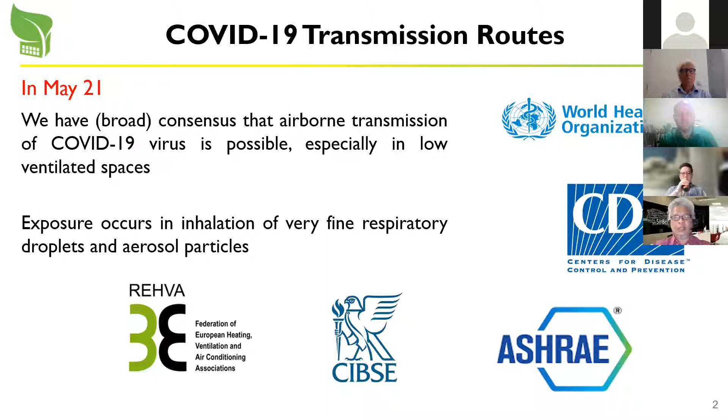So now we have broad consensus that airborne transmission of the COVID-19 virus through the air is possible, especially in low ventilated settings. This is important mainly because while we wait for herd immunity to be acquired in the community, we can craft a set of intervention procedures that will allow the economy to come back while controlling the virus. This is a big challenge. In the context of today's talk, we should be making buildings resilient for people to safely work in until we reach widespread immunity.

Back in April 2020, when the virus first started to kick off here in Singapore, we decided to develop this document for Singapore based on a precautionary approach. It is non-mandatory, and was based mainly on our many years of experience in the field of indoor air quality, mechanical engineering, exposure science, and also past research studies on other infectious diseases like measles, influenza, and tuberculosis. These recommendations are mainly for office buildings, childcare centers, and residences.

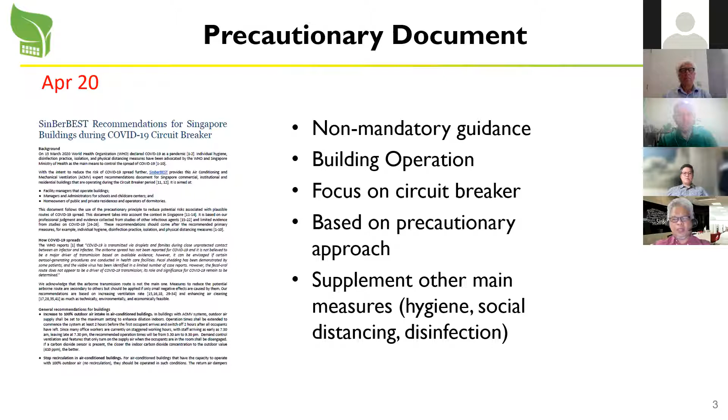About 1.5 months later, based on this document, the Singapore government came up with a technical note based on the same principles for building operation under the COVID pandemic. Just in the past month, they further refined the document. So three documents have been presented over the past 1.5 years here in Singapore on how to operate buildings to reduce the risk of airborne transmission.

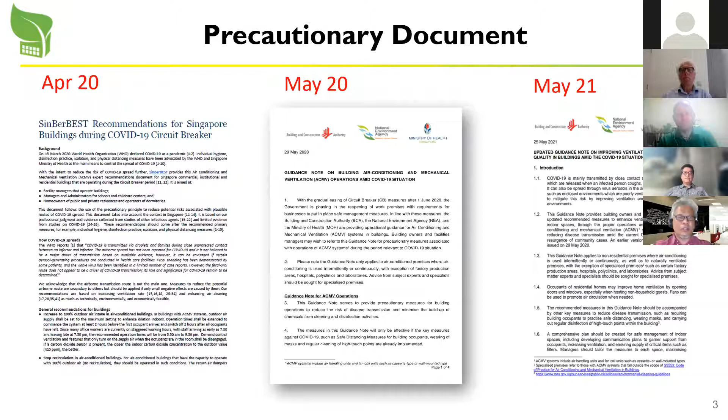So what's inside the document? First, we recommend increasing ventilation within buildings. Solution to pollution is dilution - that's the basis here. In buildings with air conditioning and mechanical ventilation systems, we recommend that outdoor air supply be set to the maximum setting to enhance dilution of pollutants within the indoor environment. We recommend operation times be extended 2 hours before the first occupant walks in, and switched off 2 hours after the last occupants have left. If buildings have demand control ventilation or features that only turn on supply air when occupants come in, we recommend that feature be turned off.

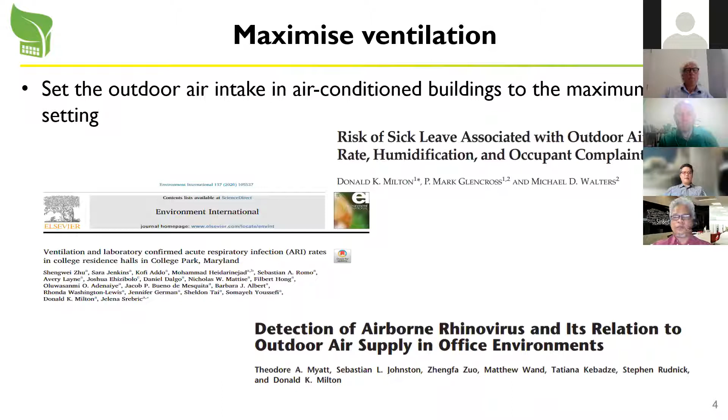Secondly, we recommend minimizing recirculation. If we have a source of virus within the indoor environment and the air contains the virus, we don't want it recirculated back into the space and resupplied into the indoor environment. For air conditioning buildings that have the capacity to operate at 100% outdoor air, we recommend the building operate in such conditions - the return air damper should be closed, and the outdoor air damper should be opened fully.

The operator should verify that acceptable conditions can be maintained in the indoor environment, because when you bring in more outdoor air, especially here in Singapore where the climate has high humidity, you may have thermal comfort issues. So if full closing of the recirculation air is not possible because of thermal comfort issues, you can reduce the recirculation air to a certain amount, and then the air should be treated using high efficiency filters, which I will talk about shortly.

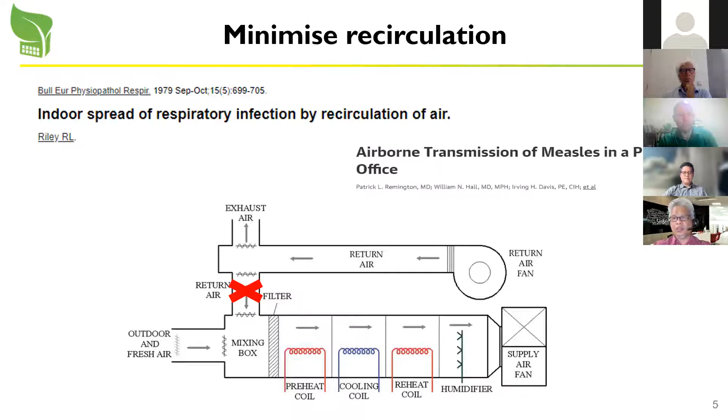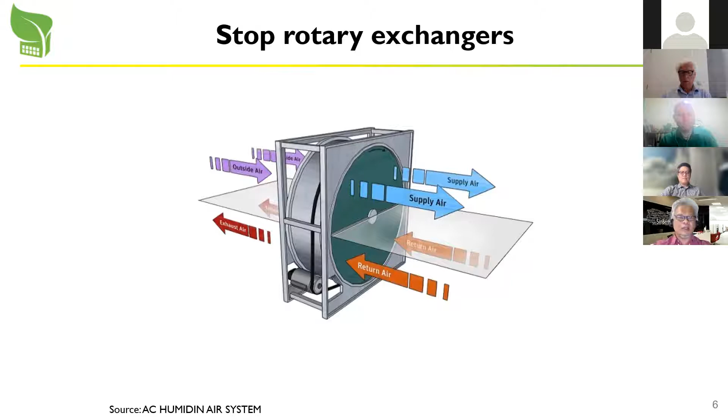Next recommendation is related to recirculation, as before. This has to do with rotary heat exchangers or heat wheels. The original intent of rotary heat exchangers is to recover heat or moisture from different air streams for energy savings. But under COVID, we do not want to recover more than heat or moisture. So to prevent exhaust recirculated air that may contain virus from getting re-entrained through bypass into the supply air, we recommend that rotary exchangers be switched off, and that any possible leaks within the wheel system be identified and subsequently sealed.

For naturally ventilated buildings with operable windows, we recommend fully opening the windows to allow air to flow into the indoor environment. When you do this, be mindful of outdoor conditions and outdoor noise, and ensure there are no obstacles in the path of the airstream within the space. We also recommend increasing air motion through the aid of ceiling fans or desk fans. And if you have air conditioning in a building designed to be naturally ventilated, such as residential buildings here in Singapore, we recommend that sufficient outdoor air be provided by cracking open the windows to allow some outdoor air to come in.

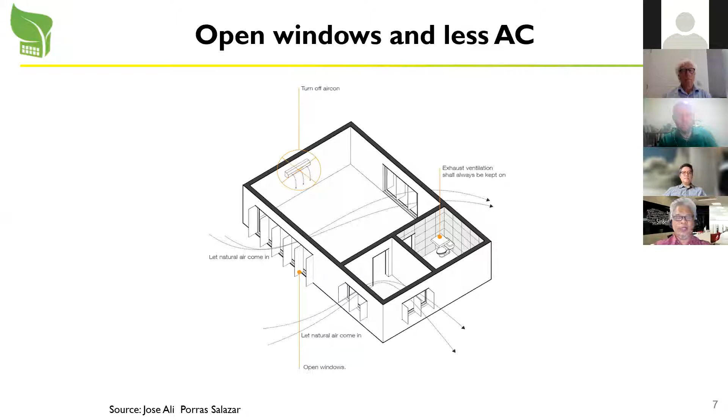But they can also exist in other aerosols of bigger sizes. So in our guidance document, we recommend the use of high efficiency media filters, preferably MERV 14, installed in the air handling unit that serves the supply air and outdoor air. Also important to note is that it's not just about installing the air filters correctly, you should make sure there's no bypass and that it is well sealed. The facility manager should always inspect the proper function of the filters to ensure there's no leakage and that filters are not fully loaded. All this should ensure optimized performance of the filters.

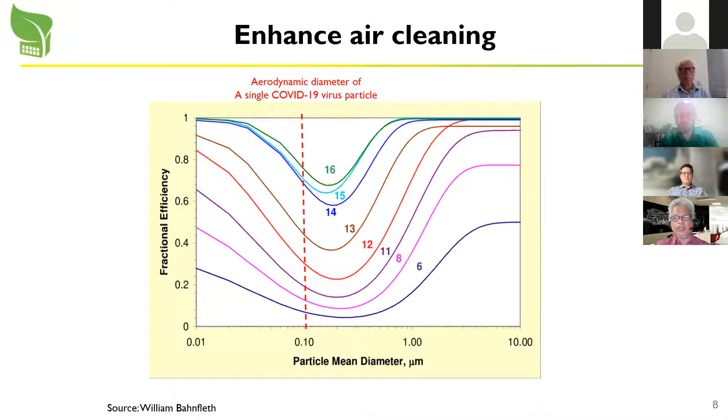We know that the virus can be inactivated using UV light, particularly at the 254 nanometer wavelength. There's been a lot of history with regards to the use of UV germicidal irradiation, and many studies have been published over the years, so it makes sense to recommend the use of UVGI technology. In the document we recommend installation of UVGI, be it a portable UVGI system, upper room UVGI, or one installed within the air conditioning system or the AHU. Just ensure that when you install UVGI systems they are professionally installed, as direct UV exposure can be harmful.

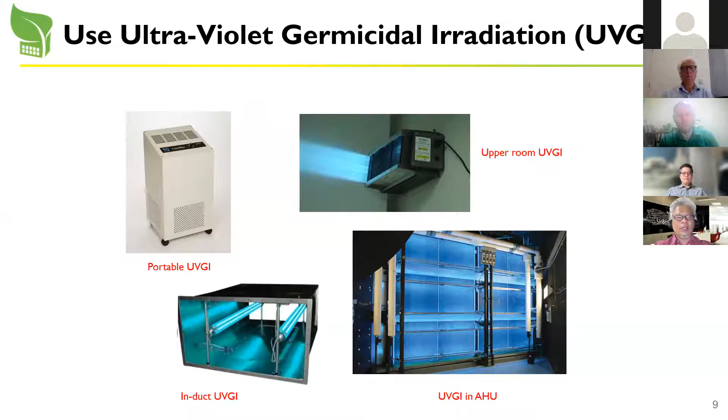Next, we recommend the use of portable air cleaners, mainly because of several reasons. One, they can be used in a smaller space, such as a bedroom or small office, and can be easily moved about, treating all the air within that space. Or you can put them in a space where there's an infected person or a susceptible person, because they can effectively clean the air within that immediate space. Thirdly, in residential buildings, especially here in Singapore, there is no mechanical ventilation system, so portable air cleaners can be very useful.

There are many technologies out there that use portable air cleaners. We recommend the use of HEPA-based portable air cleaners. We do not recommend other technologies like ion generators, photocatalytic oxidization, or electrostatic precipitators, because of the potential generation of other chemical byproducts associated with these products. So use HEPA-based portable air cleaners.

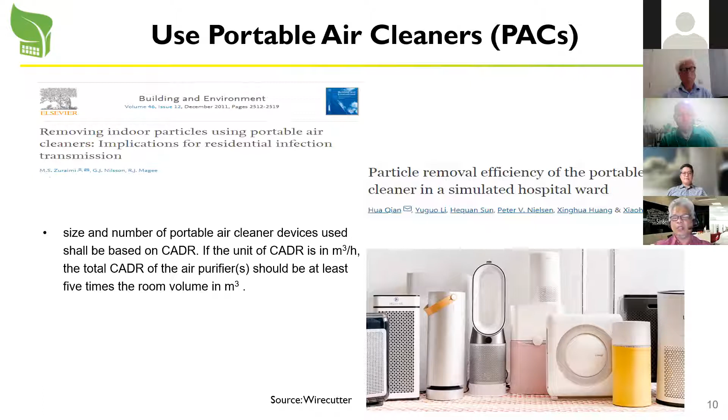One of the minor routes published in the literature relates to transmission of the virus through the fecal-oral route. In past studies, a significant portion of patients experienced diarrhea and vomiting before the onset of respiratory symptoms. Researchers found detectable genetic material in the fecal matter from cases, indicating that the virus is shed into the stools. This means that when you flush the toilet, the virus could potentially be aerosolized into the air and transported elsewhere. So we recommend the exhaust ventilation system within the toilet should always be kept on, and ensure the toilet is always under negative pressure to minimize the risk of fecal-oral transmission.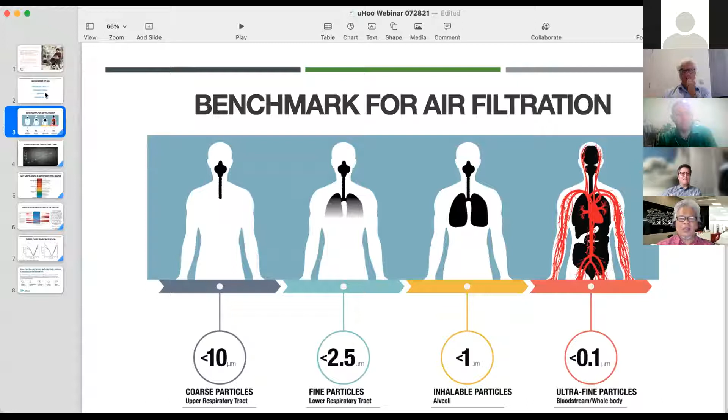But on a physical level too, if you're over 1,000 ppm, those carbon dioxide concentrations can really cut our basic decision-making, studies show, by 25%, and complex strategic thinking by 50%. So if you're an employee, this has got to have an impact on your decision-making. First, we need to address this for everyone's health. Second, we want to create environments where everyone is performing to their highest potential. So this is really the health impact of poor ventilation - not only exposure to aerosolized viruses, but anything over 1,000 ppm will have that cognitive impact.

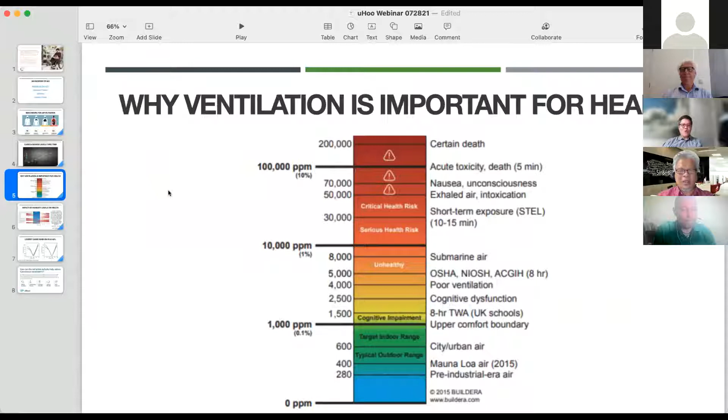And how do you know if you have high CO2 levels? You need monitoring in place, right? So that was part of the poll question. If you don't know where you are, you can't address it. So that's really, really important.

The third aspect, aside from filtration and ventilation, is humidity levels. This is kind of under the radar for a lot of people, but the physiological barriers and passages from the nose to the depth of the lungs are most functional between 40 to 60%. The mucus lining in the passages prevents pathogens like COVID-19 from getting deeper into the tissues, but when it's too dry, they dry out and can't protect you as well.

So there's an optimal zone here. If you go too low, you're going to be susceptible to viruses and bacteria. If it's too high, you're going to be susceptible to things like mold, asthma, rhinitis, and allergies. So you really want to keep your built environment in the 40 to 60 range.

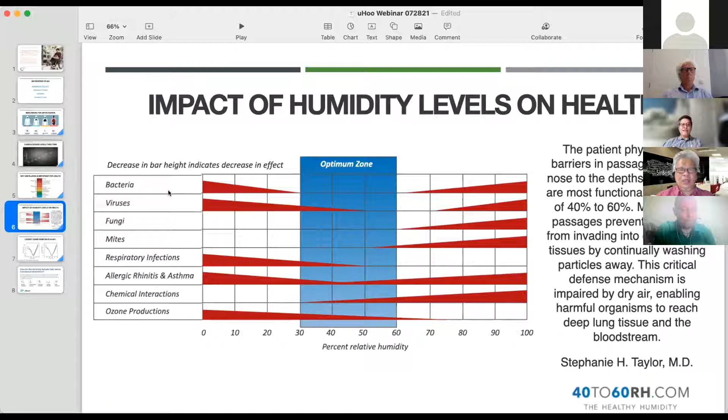More specifically, if you look at this study, it shows daily new cases and daily new deaths. This is a study from Harvard and MIT. They found that the lowest amount of new cases and lowest amount of new deaths were in built environments where the relative humidity was around 55. So I always keep my humidity at 55 because of all these studies where optimal health and humidity control are related.

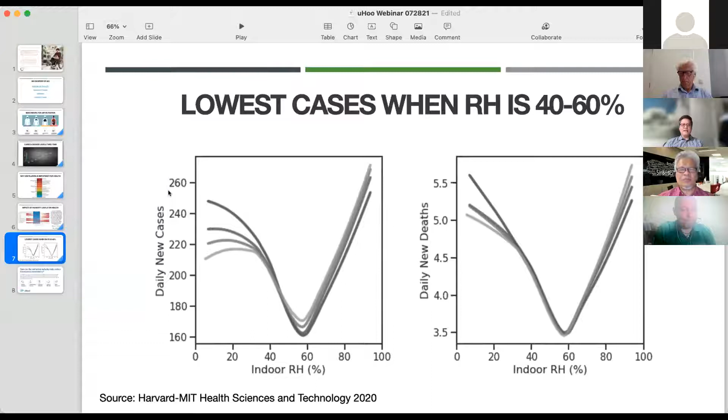So just to wrap up here, this is another organization aside from the International Well Building Institute, called Fitwel. It's a great resource to learn more about how to use science to create the healthiest environments. They also give certifications to give people more peace of mind. The three other things we talked about here, increased ventilation, optimal humidity, and filtered indoor air, are key components of protecting people within the built environment.

And then obviously we want to make sure, because there is a chance that if you touch something and wipe your mouth, you can get exposed. So we want to wash our hands, and there are cleaning protocols just for basic level cleaning.

And the last thing I want to say, the most important thing, is that if you don't know what the status of your air is, there's no way you can get it to optimal levels. So it's really important to have monitoring in place, and then use that monitoring, the insight that comes from it, to optimize the space through ventilation, humidity, and filtration controls to keep everything at an optimal level. And that's what's going to get us through COVID, even amidst this Delta variant. But even after COVID, once we're back into the new normal, it's going to happen again.

And it's also about our overall health. So things like the uHoo Aura top-rated monitoring system, there are others, it's really important to have these types of technological tools in place. Nothing can match our natural monitoring system in nature and our bodies, but in the building, we want to mimic it as closely as possible using the latest technology. So I hope I was able to share something new for you, and happy to be with you and move on to the discussion.

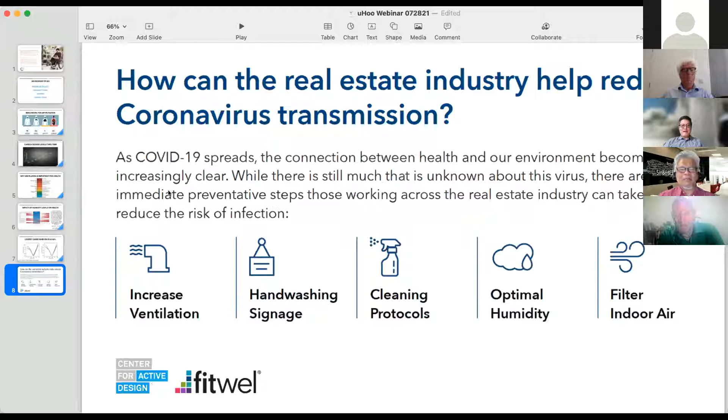Great content, Michael. Thanks so much, I fully agree with you. If we don't monitor what's going on, we don't know what's happening.

I remember being in a bank at a meeting in Subic Bay, and I switched on my uHoo. That was before the pandemic, and the CO2 levels there were above 7,000 ppm. When I told those guys there, they kind of didn't really know, but the lady who was running the bank was quite health conscious, and she asked immediately, what can we do?

But one thing, you mentioned 40 to 60 humidity, that's in line with the uHoo virus index as well. How do you actually maintain that in your building? You said you always keep it around 55. What tools do you use?

So most of the solutions that I deploy are in the residential space, and we do commercial as well. But in the home environment it's much easier, because you have either a whole house humidifier or a whole house dehumidifier. So when you set your smart thermostat or smart control, I keep it right around 55. Then if the humidity starts to go down in the wintertime, your whole house humidifier kicks on and puts more humidity through your HVAC system.

Vice versa, in the summer, the dehumidifier kicks on and brings it down to that level. In the commercial space, you have those same tools, but not a lot of buildings implement whole building humidification systems, so it's a little more challenging.